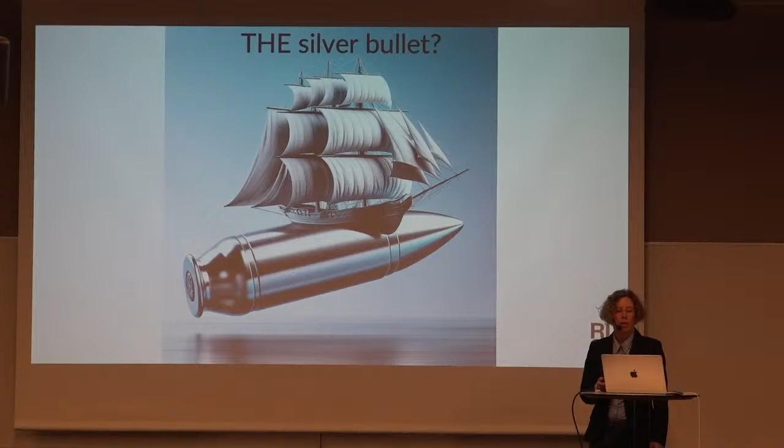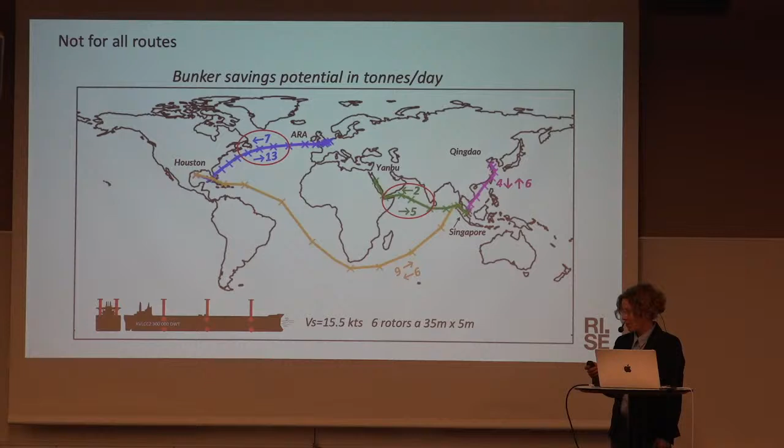But having said that, there are many merits. It's a technology that is available today, and we don't need any new infrastructure in the ports for bunkering. It's a free source of energy, and it's predictable. That's maybe surprising for some of you when I say that wind energy is predictable.

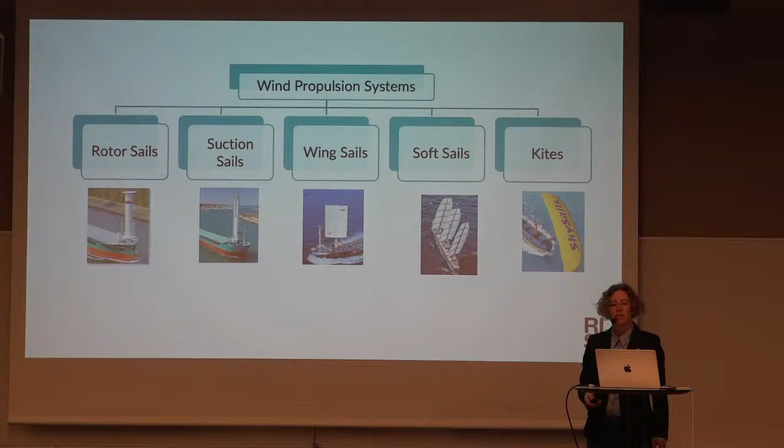So to give you a short overview of the techniques on the market today. Probably many of you have heard these words: rotor sails, suction sails, and wing sails. These are the most dominating technologies today. Soft sails are mainly applied on large yachts, and a few examples of kites exist. But mainly rotor sails, suction sails, and wing sails dominate the market.

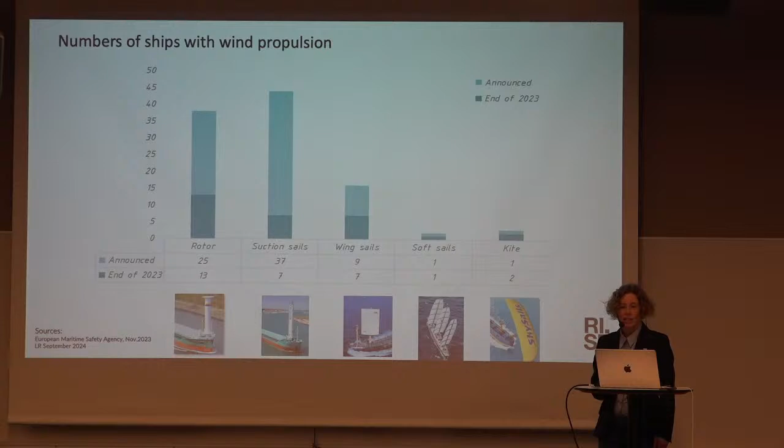Here we see the number of installations. These numbers are a bit old, but rotor sails and suction sails are still dominating. All in all, the latest number is I think 53 cargo vessels with wind propulsion out on the water today. That's a lot compared to a few years ago when we had one or two, but it's still only a fraction of the world fleet.

So I'm from RISE, Research Institutes of Sweden. It's owned by the government and an independent institute doing both research and service to the industry. So I will in this presentation talk a little bit about how we as a research institute can support this industry and the development of this new industry.

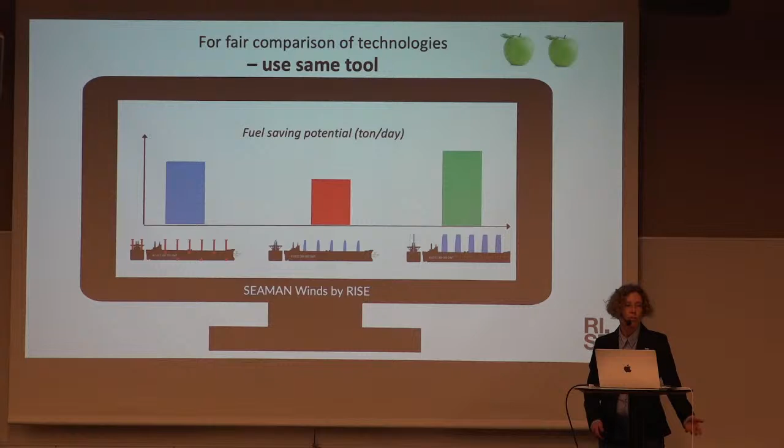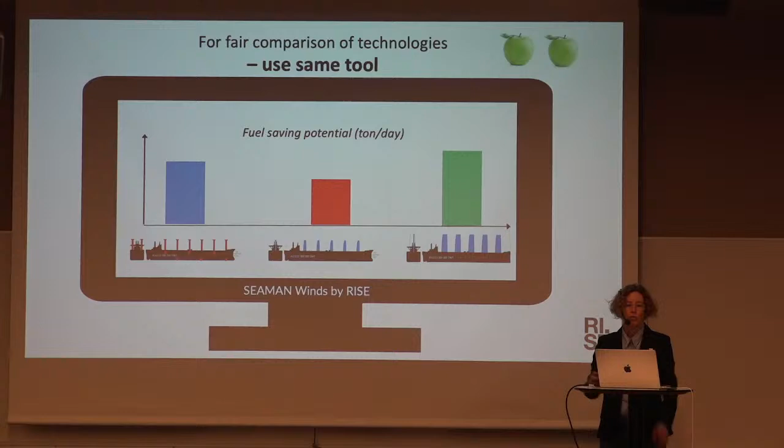So, for example, we at RISE have developed a tool we call SEAMAN Winds. There are many other organizations, universities and so on, that have their own tool that can do the same thing. But really the important thing is when we compare devices, we have to use the same tool and not take results from 3 different sources or organizations.

Inside such a tool, for us and probably the same for all the others with this kind of tool, there are 2 steps. It's a performance prediction program and a voyage simulation. So these 2 components are required, and these 2 in combination give a fuel saving en route, and that's really the performance KPI that we use, or power or energy saving on a route. So not the fuel saving on a particular wind or a particular day, but we have to take the average weather on a route covering both winter and summer and so on.

Inside such a program there are many small modules. It looks complicated and I will not go through it in detail. But the trick is to be able to use such a tool at different levels of complexity throughout the project. So when we start in the early phase with a market scan, we only use database sources from previous projects and so on. Then as we continue in the project phase, we can add more and more complexity to the calculations. And in the design phase, we can use, of course, all the big guns that we have.

And finally, end up with a sea trial where we can compare with a prediction. So just to give you one example of what can be a difference between these steps, I will mention here the assessment of the forces from a Flettner rotor. In the first stage, we just model the rotor standing on the floor as a single object, and we get some thrust force, for example.

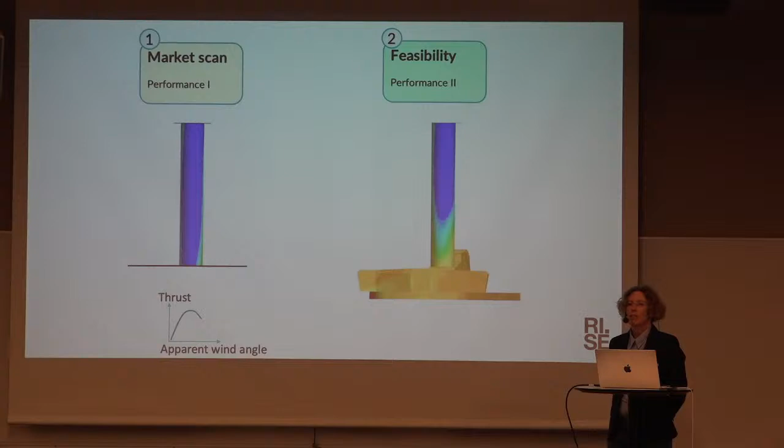In the next step, we put the same rotor on a ship and conduct CFD simulation for the same rotor. And here you see that the flow pattern is actually quite different now. When we put the same rotor on the ship, you see this blue area is the suction area, which provides the force, and it is much smaller now when we put it on the ship deck due to the disturbance of the hull. This is something that we still need to study more and do more research on, and here we have good help from a research project called Interact from Trafikverket.

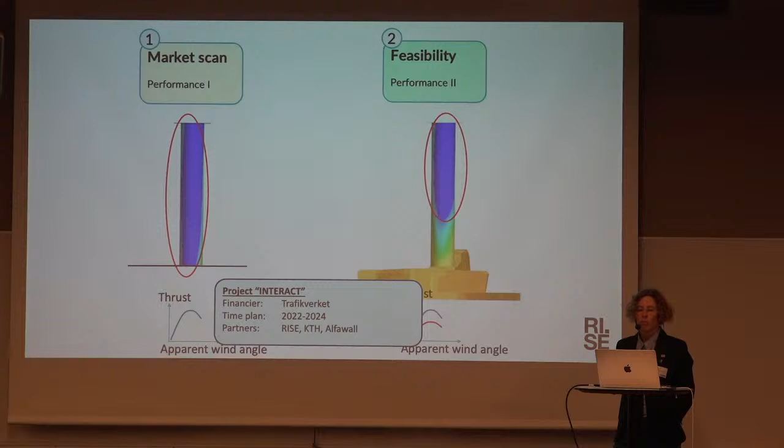Another important aspect to consider here in the performance assessment stage is interaction between wings or between rotors that we should not forget. And the best way to assess this is, of course, with CFD. The problem is that it's really heavy computations. It takes thousands of CPU hours, and it's difficult to use this tool in a design stage covering all the wind directions, all sheet angles, and so on.

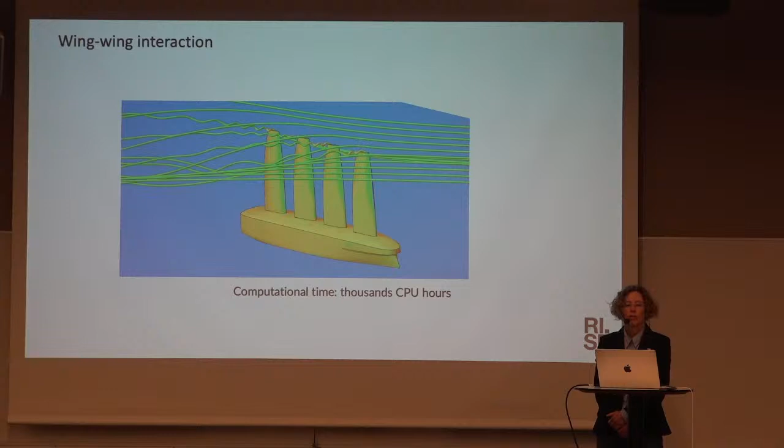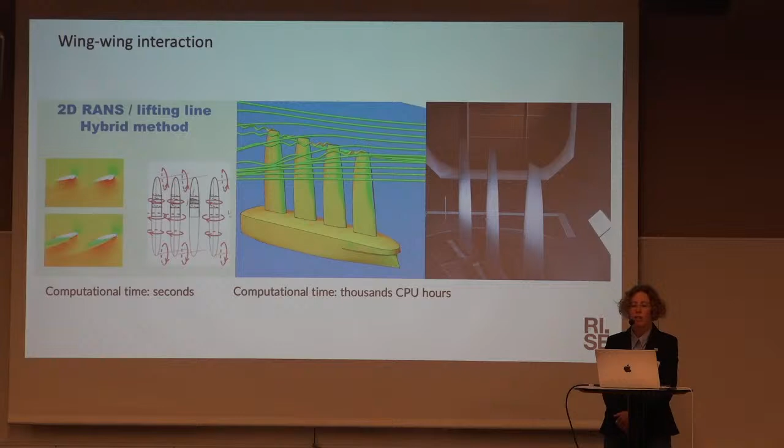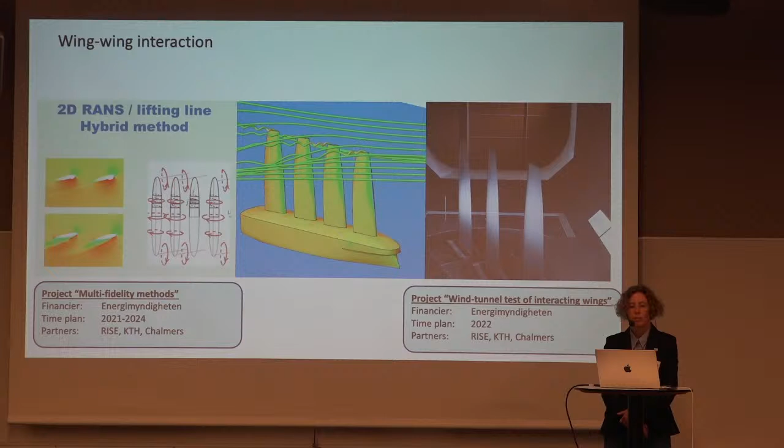So for that reason, we have spent a lot of time and effort to derive also low fidelity methods using a combination of RANS and lifting line to develop hybrid methods, which we also validated in wind tunnel in Southampton. Here you see the wind tunnel test with 3 wing sails in a row, really to see the interaction between them. Each wing here is almost one meter tall, so it was quite big wings. Here we got really great support from Energimyndigheten in 2 different projects to develop these methods and do the validation.

But fuel saving is not only a technical question, so it's not only a question for me, but also for other experts. And I explain what I mean by that with this example from another project. Here we see the fuel consumption curve for different speeds for a given vessel without wind propulsion and with wind propulsion. So in this example here, for example, at 16 knots, we could decrease the fuel consumption by 20%, roughly. Now, if we add weather routing on top of this, we can lower the fuel consumption considerably more. So the weather routing has really a huge effect here.

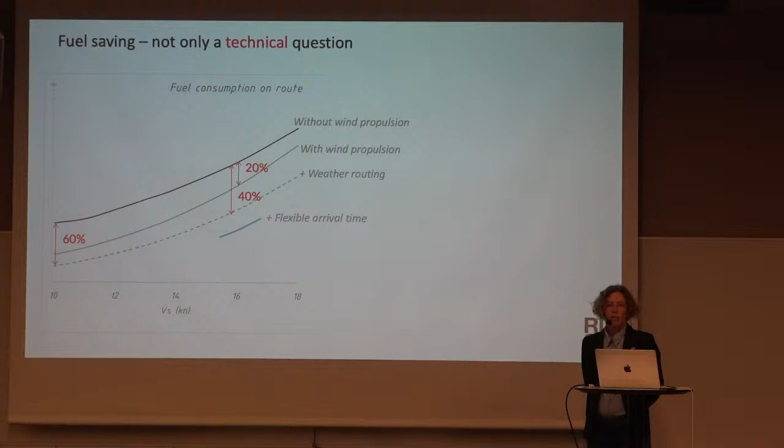If we look at 10 knots instead, the percentage number changes a lot, and we have here 60%. Now, if we also on top of this say that we have a flexible arrival time, we can be more flexible when we use engine or not. We can lower the curve even more.

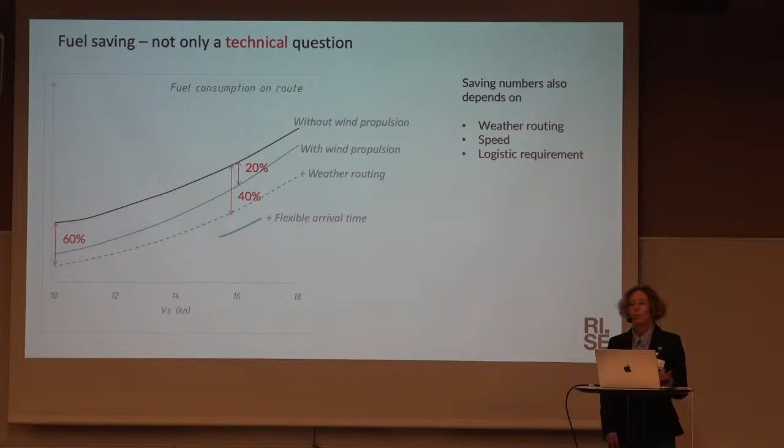So with this example, I want to show that the saving numbers that we hear is not only just a technical question. It's not only looking at this ship, what will this ship give, or this wing solution, rotor solution, what will it give. The number depends completely on how we will operate. So we will use the weather routing, the speed, logistic requirements. So that's why crew and cargo owners are also key players, and not only naval architects. Okay, so that was a performance assessment.

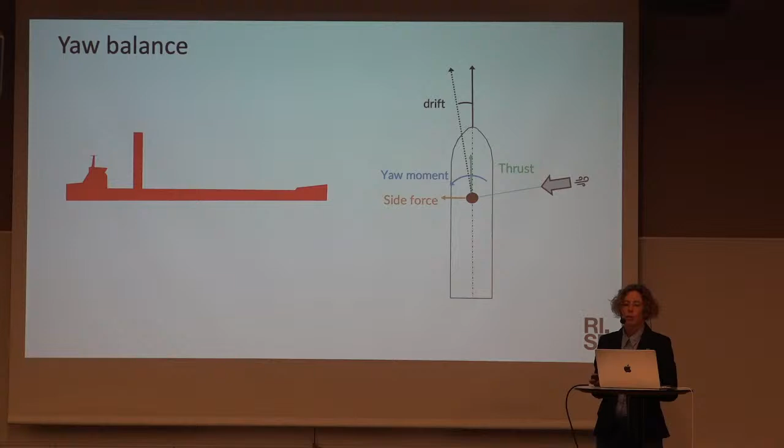I move into maneuverability. Here it's important to look at the yaw balance. That's more important for projects with wind propulsion than conventional projects. Because both the rotor sails or wing sails, they produce, of course, the thrust force. That's what they are meant to do, but also side force. That makes the ship have a drift angle, but there will also be a yaw moment, which you need to balance with a rudder.

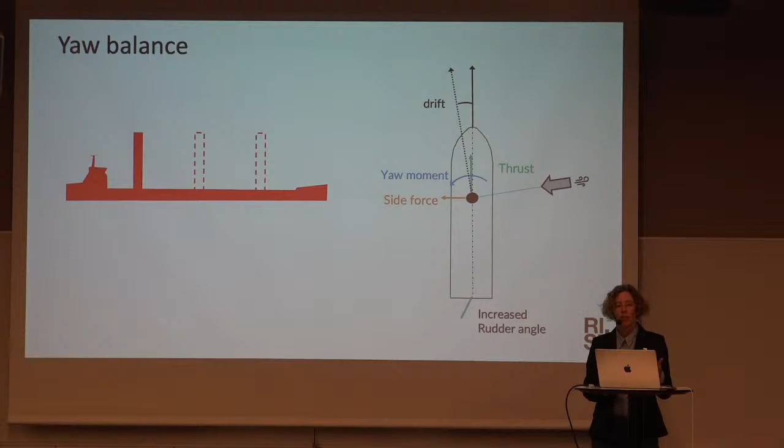This yaw moment and yaw balance, it depends. It's affected a lot by the position of the wing sail or the rotor sail on the ship. So that's why it's very important to analyze this at an early design stage. I mean, if we continue too far in the design and discover this problem late, it will be quite expensive to do changes. Here I will give one example that illustrates this.

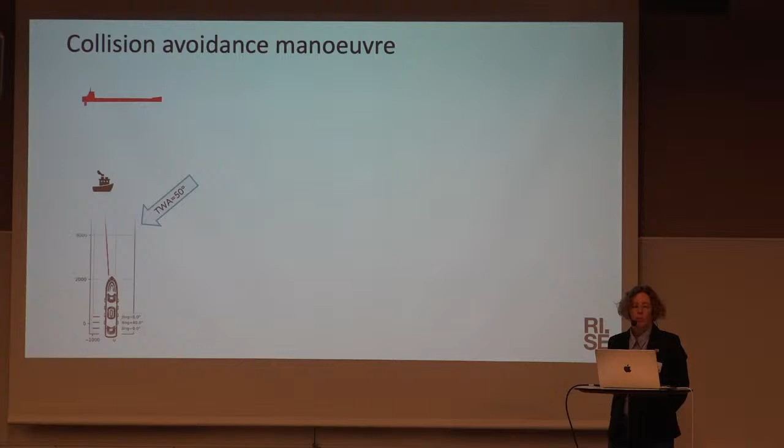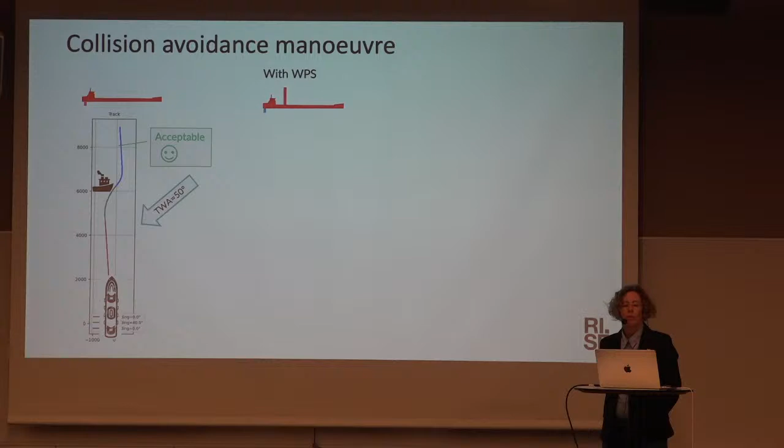So here we have a normal ship without wind propulsion. We do a time domain simulation here, a collision avoidance maneuver. The ship discovers this small fishing vessel and does an avoidance maneuver and comes back to course. So this is acceptable. Now we add this Flettner rotor on this fictive ship and try to repeat the simulation. And here the ship cannot come back to the original heading because the initial rudder angle was too large just to keep the course.

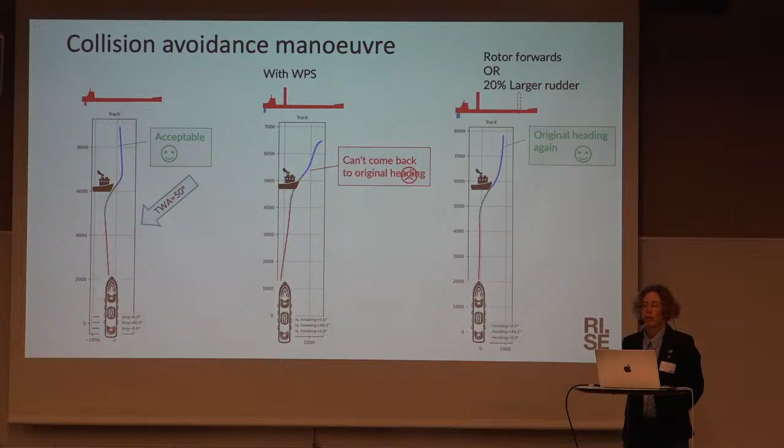Now we can do two things. We can either move this rotor more forward or increase the rudder area. And we try again, and we see that now it's acceptable again. This kind of study is fairly quick and easy to do at an early design stage, and we found it's really useful to find problems and correct them at this stage.

So the ship motions change the forces on the wing sails, but also the wing sails change the ship motions, because it adds aerodynamic damping to the ship. So this interacting effect is also quite interesting to study. These kind of simulations can be very useful for checking the control systems and also assessing loads for structural fatigue and so on.

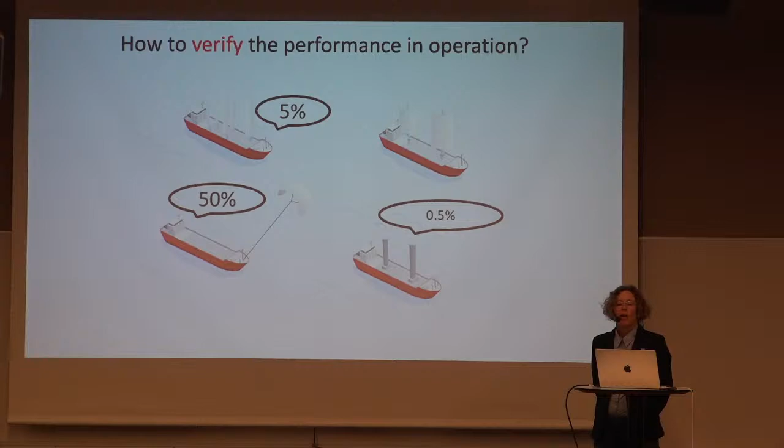Good, we move on to sea trials and how to verify the performance in operation in real life.

We received this question back in 2020 to verify the performance of five vessels in an EU research project, and there was no procedure at that time for how to do such a sea trial. So we had to derive a sea trial procedure, which we then brought into the ITTC committee, and that ended up becoming the procedure that is now published.

Very briefly, here's how it works. It's simply on-off runs, short runs with the wind propulsion device on and off, in a minimum of 5 wind directions. We measure the speed, engine power, and the wind, and from that we can work out whether the power saving prediction was correct or as expected.

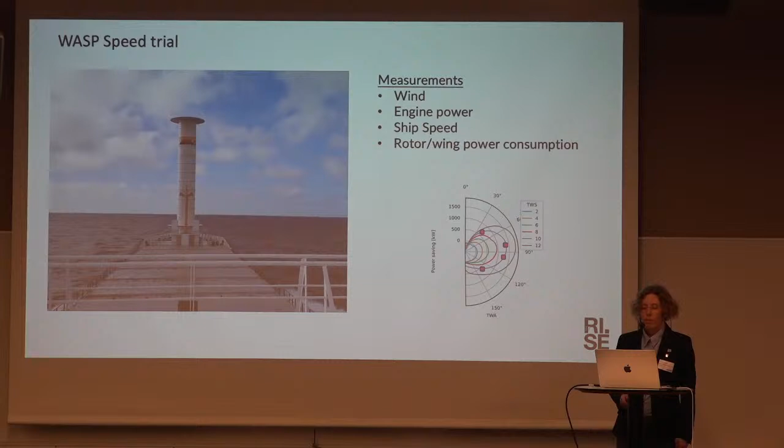Here are some examples, and you see there's some scatter in the results, of course, since this is full-scale measurements. But at least it gives some indication of the savings.

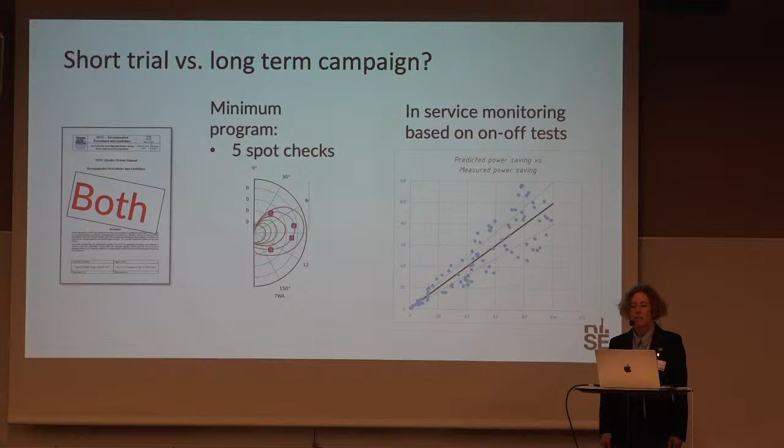This procedure describes how we can do this both in short trials and long-term campaigns. So for a short trial with 5 points, it takes 1 day to conduct, giving just a spot check of the polar. But we can also continue for weeks or months, gathering more data, and see how it corresponds to the prediction.

Okay, final subject here: operational aspects.

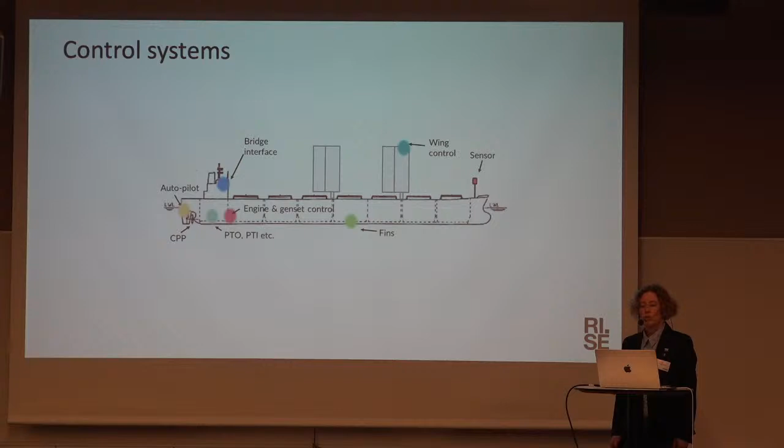These vessels, like all vessels, have various control systems. But maybe even more important now for wind-assisted ships is that the control systems work well together, especially the wing control or rotor control system with the sensors and the propeller engine, so that these kinds of ships work in the most optimal way.

One problem is that there are probably different companies and organizations providing all these devices. So one company provides the wings, another the propeller, and they have their own control systems with IP rights and so on. How can we make sure that they work well together?

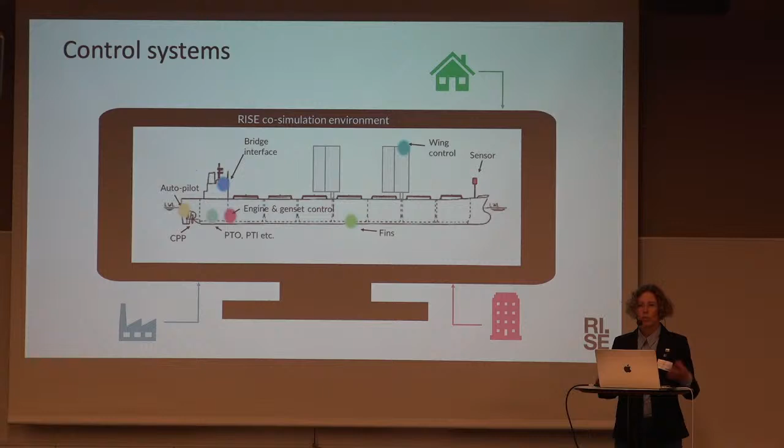So here we have developed what we call a co-simulation platform, working with FMI, so that all these organizations can plug in their control system to one common platform and make sure they work properly together. This is something we work on in a project from Hållbar Sjöfart called Virtual Wind Ship.

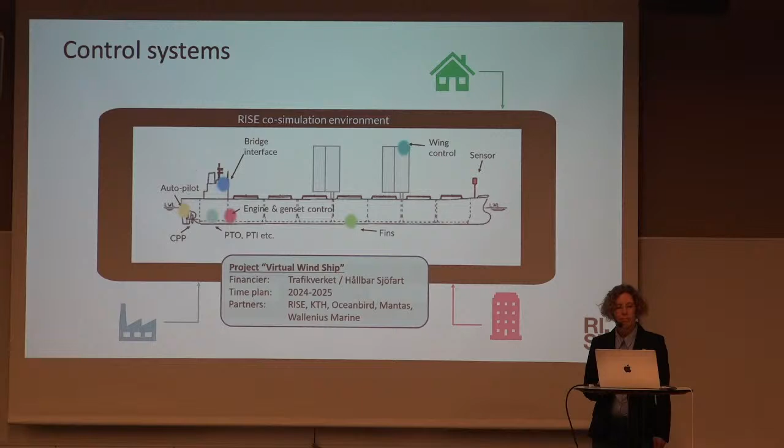Another topic, sail trimming, and I think Olis will talk more about that later. But just as on a normal sailing boat, the sail or the wing needs to be adjusted to the wind direction to work in the best way.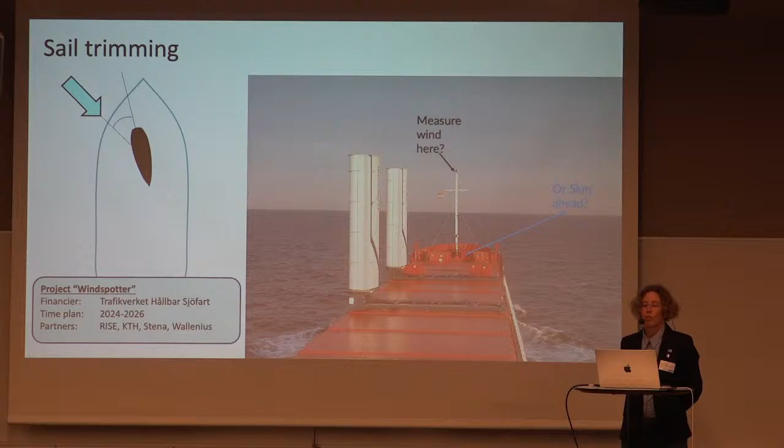And here we have just started a project called Windspotter, also from Hållbar Sjöfart, where we will look into the possibility of using LiDAR to spot the wind shift before it comes, and be prepared for it.

Finally, a few words about the crew.

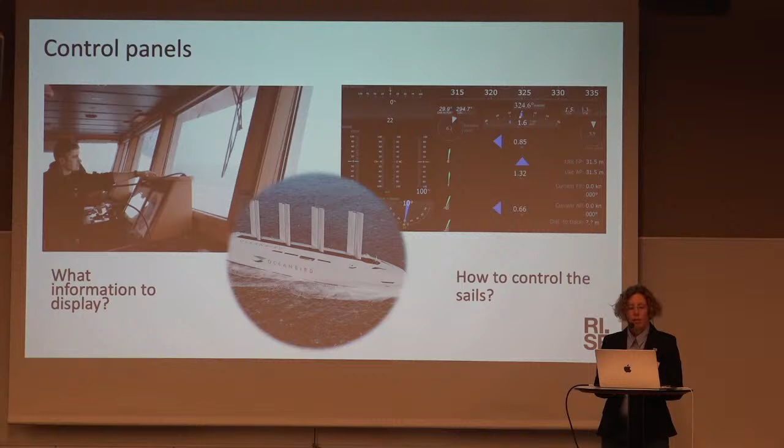This new technology will require some control panels, and how should these control panels be designed so that the crew can operate it in the best way? What information do they want to see? To test this, we have had sessions in our simulator with real captains to try out different control panel designs, see how they interpret them, how they can understand it, how easy it is to operate. This has been really useful feedback to the designer of the wind propulsion devices, helping make the control panels more understandable.

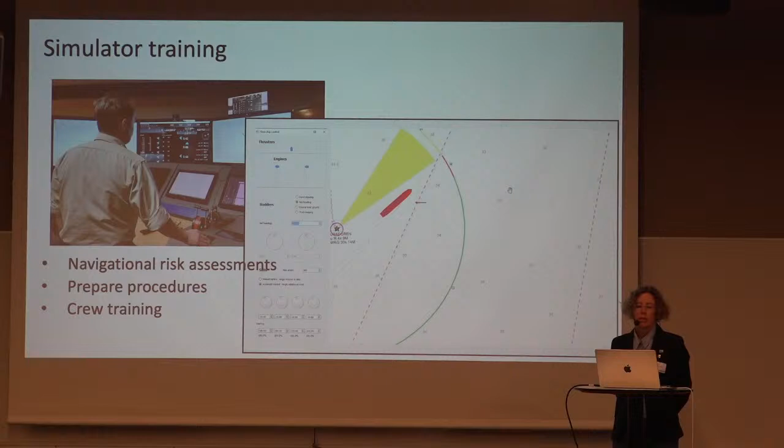Then, of course, the same simulator setup can be used for training crew and preparing procedures and risk assessments.

A short summary of what I tried to tell here is that research efforts are really essential for reaching the climate goals of shipping. Sweden currently has great excellence in wind propulsion for ships, and we should really use that. We have institutes, universities, and industry working together, with strong support from authorities, which has been essential to develop all the tools and knowledge that we now have in Sweden. I hope this will continue, and we're very thankful for all the support we've received.

Thank you, Sofia. Thank you.

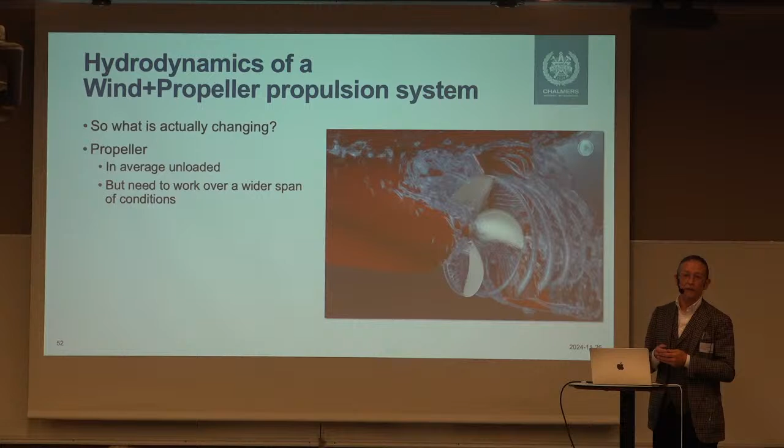I will focus not on the hull design or hydrodynamics in general, but on the propulsion system - how the hull, propeller and rudder interact, what effects that has, and the need for research and what we have done lately. So what is actually changing? Well, if we now have these savings that Sofia talked about, this means that the propeller will be unloaded, requiring less force or less thrust from the propeller.

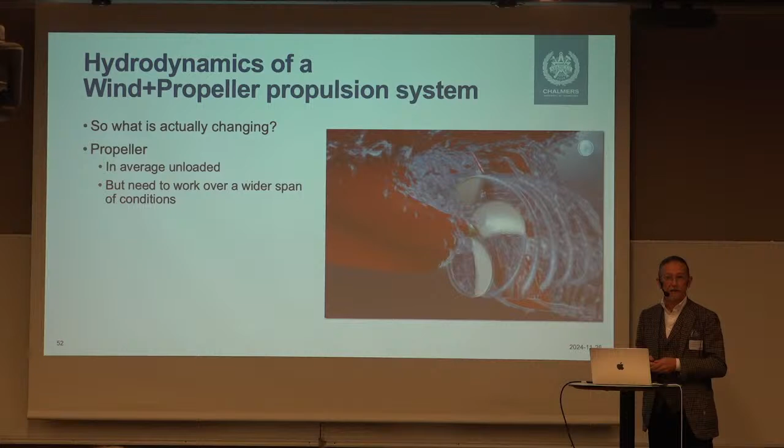That might change the design. But at the same point, if we now talk about motor sailing for a vessel that's normally sailing but needs to be operable in heavy weather, we have a huge range of operating conditions that this propeller or propulsion system should manage. From zero, where you're only sailing and need as little drag as possible, to maybe operating in tough weather at heavy load. So this poses challenges for the marine propulsion system.

Sofia also mentioned the rudder. If you're now sailing, you have less flow over the rudder, which means you'll have less side force from the rudder. That also affects maneuverability, in addition to the drift, which you need to compensate for with the rudder, depending on how the sail arrangement is done.

So I'll talk a little bit about a few of these aspects and give some examples, including scale effects. Traditionally, we know how to do model scale experiments and full-scale performance predictions with a margin comparable to sea trial tests. But now that we have the wind, unloading of the propeller, and rudder effects, these things might change, so we need to consider them as well.

The first thing I'll talk about is a project we ran here with Lighthouse, where we looked at propeller design. The first question is: at which design point should we design the propeller for? In this case, we're sailing with zero thrust as the main idea of this vessel, but we have operation points at different thrusts.

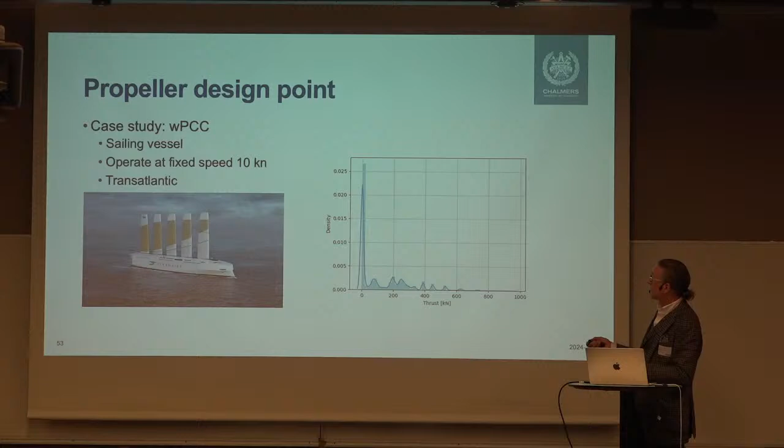Here's the thrust, and here's the probability, or how much time we spend in these operating conditions. Normally one operates here 90% of the time or more for a vessel, so then it's quite obvious. But if we now have this range of conditions, for what condition should we design the propeller? Here we also looked at controllable pitch operation to cover this setting.

This becomes even more important if we sail against the wind - then we might run into problems being beyond the engine limit, and the controllable pitch becomes crucial. For this kind of vessel, we also did a study with a tanker with approximately 15 to 20% average wind power, and it was perfectly fine to use the traditional fixed pitch already installed. But for this case, with these huge variations, a controllable pitch is essential for the operation.

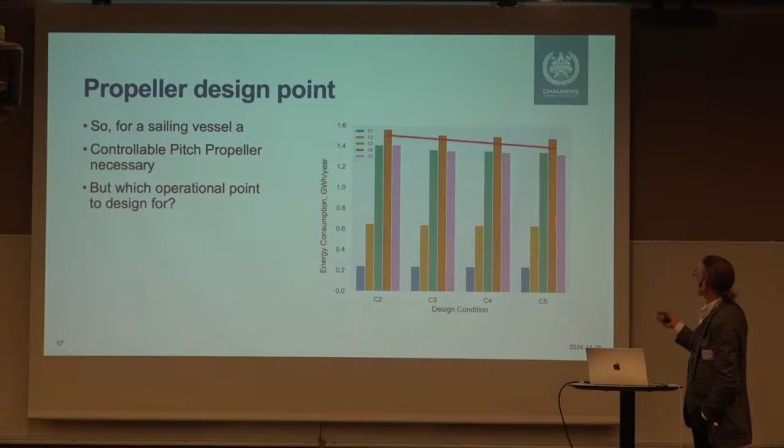We can see a clear trend that if we design the propeller for C5, the most heavy condition, we gain the most total savings for this vessel. Actually, even though C4 was the most common condition, from an energy perspective C5 design covered that well too. So the experience from this test case was that we need to design for the heavy loading condition and make sure it also operates okay in the lighter loaded conditions.

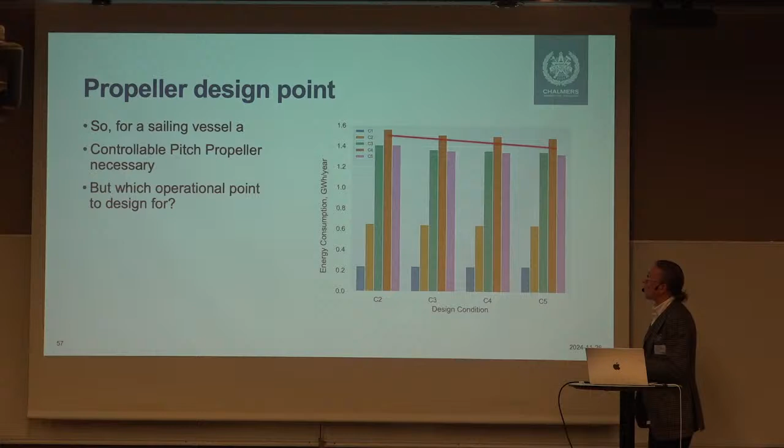So this was one experience from this sail prop project that we ran within Lighthouse.

Then looking at system effects a little bit, we have recently looked at this chemical tanker. I think Klaus is here somewhere - it happened to be a Tarntank, but it's a Kongsberg design, so we used that in our study. Tarntank was not involved in this one at this stage, at least. We just wanted to look at the system effects of this vessel.

So we assumed wind-assisted conditions from 0 to 20%, just hypothetically, without thinking about the aerodynamics of it, just to look at how the propeller works.

And we looked at two different designs. So we had the original design, which is already a very slim, low area blade. But designing for the wind condition, Kongsberg did this design, so we reduced the area even further. So how much do you then gain by changing the propeller at the same time as you add the wind assistance to this kind of vessel?

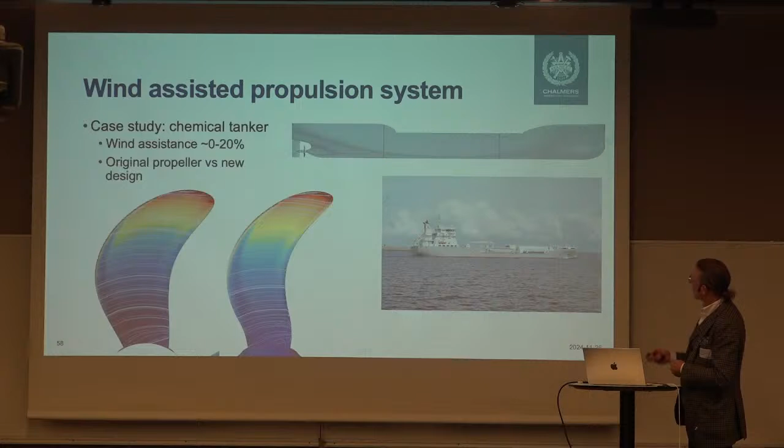Okay. So we did the self-propulsion CFD, so we ran the ship. Now we didn't consider all aerodynamic effects. This was limited to hydrodynamics, so we didn't include the drift angle, for example, or variations in wind. But we ran self-propulsion in full scale with the original propeller and the new design of the propeller here. And we assumed a wind thrust from 0 addition to approximately 20% added wind.

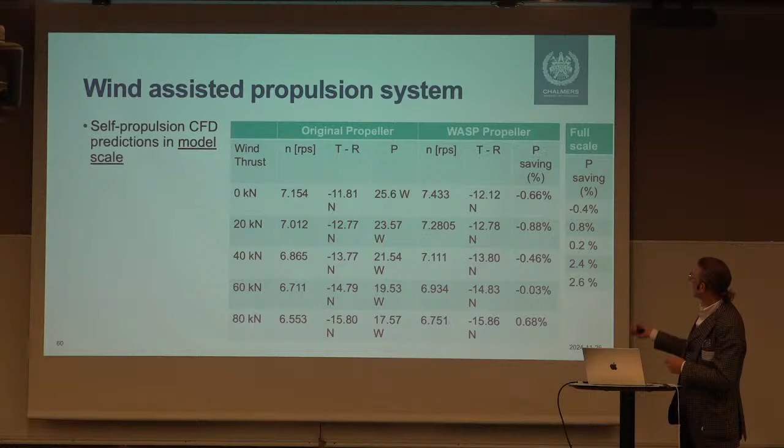Then the interesting part comes if we look at model scale instead. So we did exactly the same thing in model scale. And then you can see the predicted savings here. So in fact, doing the same study in model scale, we don't see any additional gain from the hydrodynamics. So there's a clear scale aspect to this, that a model scale test, model scale simulation assessment will not give the same answer as if we do it in full scale. So what's going on? We don't know for the moment.

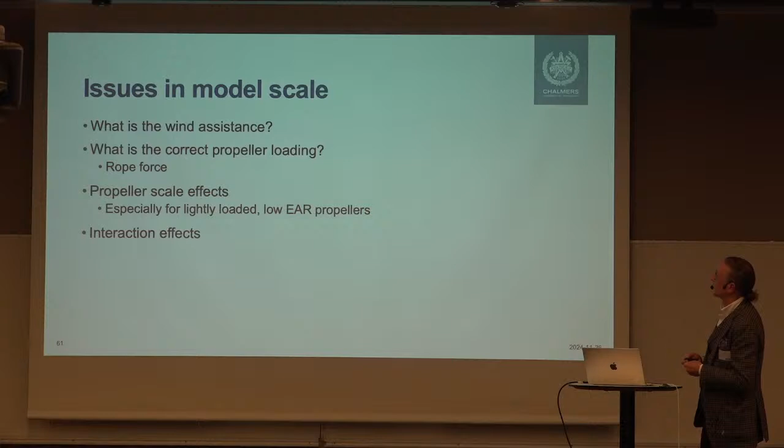But there are, of course, issues. We had to assume something. How do we translate the wind assist in? So it's easy in full scale. We know the resistance. We can assume this amount of force. But to predict the wind power or wind thrust in model scale is also a challenge. And also, how should we balance? What's the propeller load? So if we do a model scale test, we add a rope force in order to get the correct propeller loading for the self-propulsion test. But how do we do that when we have wind assistance? How do we combine these?

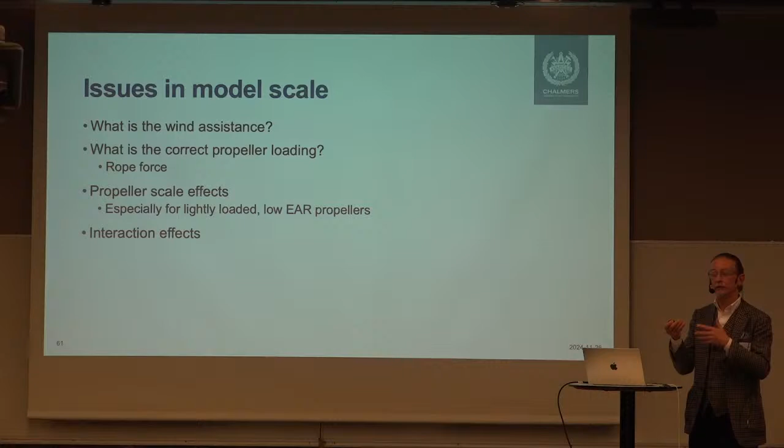And then we have scale effects on the propeller and on the hull to consider, which we believe are even more important when we have these really low blade area propellers. There are other effects than friction that come into play. So this is also unexplored. And there are then obviously, as we saw in the previous slide, interaction effects between these. They don't work the same in model scale as in full scale. And these are research questions that partly at least will be addressed in a new PhD project at Chalmers and RISE that is funded by Lighthouse. So these are open areas to look into.

Finally then, thinking about rudder performance, I mentioned before that we get less side force. So if we look at the standard lift, this is the lift coefficient here to the angle of attack of a foil section. We can see here that we get a linear behavior depending on the angle of attack of the foil. But this is then the lift coefficient. So to get the force, we need to multiply by the velocity, so the velocity comes into play here.

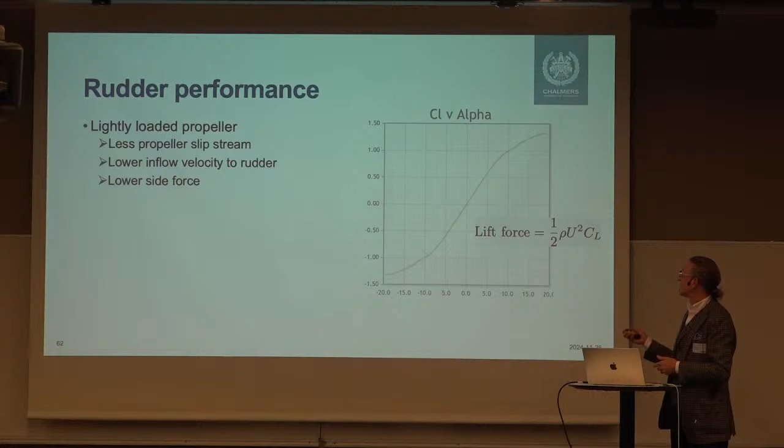And the velocity for a rudder, if placed behind the propeller, is governed by the propeller slip. So the propeller accelerates the flow, so it controls the flow over the rudder. Which means that if we now have less propeller loading, the propeller slip will be reduced, so the velocity will be reduced, and thus the force. Even if we're at the same angle of attack and have the same lift coefficient, the actual force will be less.

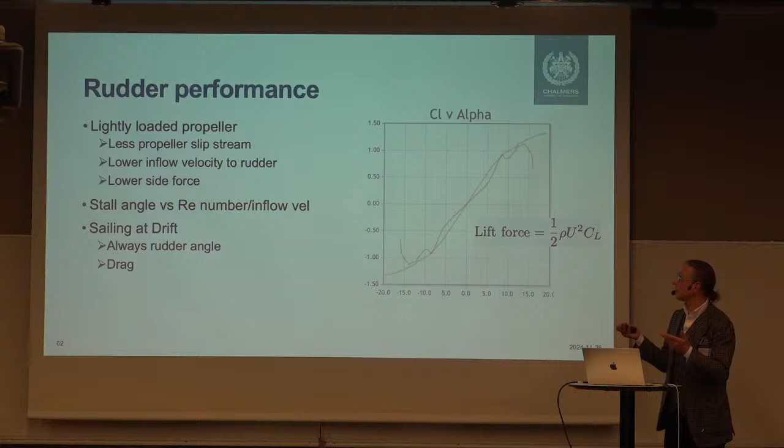We'll also, with this lower velocity, might run into stall problems and a bit more complicated behavior because of this lower velocity. So there are more aspects, we believe, to looking at the rudder than changing just the size of it. It was also mentioned that at drift we always have a rudder angle. So increasing the size will increase the drag when we have low velocity or normal operation, but it will also increase drag for sailing at drift.

So this is also an upcoming project, where we're looking at propeller-rudder interaction for sailing conditions with different angles of attack and lightly loaded propellers, low slipstream, to actually figure out what goes on and in the long run see if we can improve the propeller or the rudder design for wind-assisted vessels.

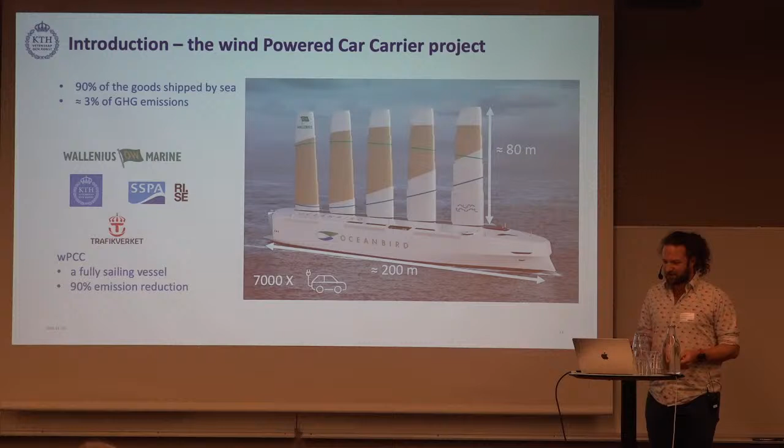It looked like that at the beginning. You might have seen it look like that. Actually, Ricardo did, so I think you've seen all versions so far. Still the same idea, just the commercial design evolved at the same time as the research project. And then it ended up looking like this, the latest version with new wings that I think we will hear about this afternoon. They got a little bit shorter, but a bit more efficient, so it should work anyway. So most of that was done in this context.

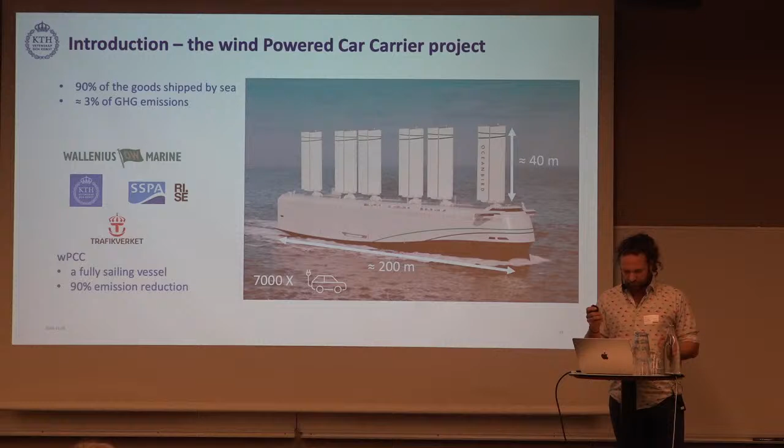One of the biggest questions that we've tried to answer at KTH so far is, how do we control these huge wings, and the whole vessel? Because that beautiful ship that I showed at the beginning had a fairly large crew to do that. Can we really today have a crew sitting on the deck and look at 80-meter wings and trim them? Probably not, for many reasons. First, they don't really know how to do that. That's not their job. Second, an 80-meter wing is kind of hard to look at. So you can't really do it.

And it's not like a normal sailing boat where you can just sit and feel, okay, I trim my main sail a bit and I feel that I go faster. You won't really feel much on this huge ship. But anyway, we need to try to control them. And there are some questions we need to answer before being able to control them. The first one, even though it feels obvious, is that we need to know the wind, because the wind is our fuel. The wind is really what we need.

So one question, or two questions, since there are two question marks, is how the wind profile evolves vertically offshore, and how much influence we have of the vessel versus the other.

That's one question. Another question that Sophia has already talked a little bit about is how are the wings interacting with each other, with the hull? This is fairly important because now again we're talking about a wind propulsion project. We need a lot of surface to generate enough thrust. If we put one, maybe two systems, it's a little bit easier, but now we really need to get the best out of that. So we need to make sure that we understand that very well.

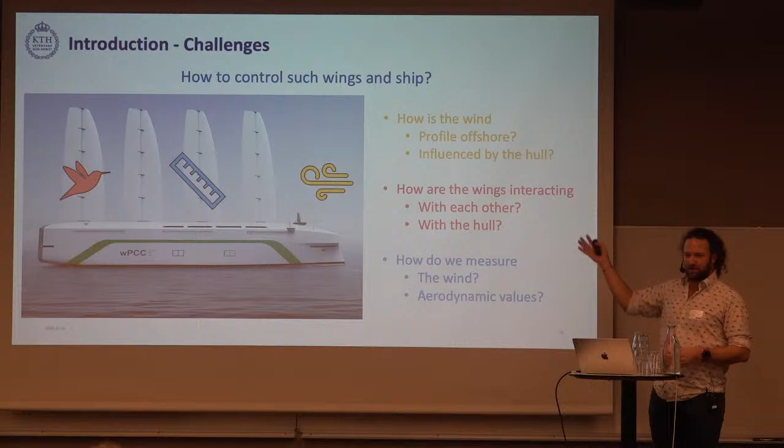And another aspect that is slightly different is how do we measure things? It's actually pretty tricky. How do we measure the wind? How do we measure the aerodynamic values? Like when we talk about the lift coefficient of an airfoil, of course in a wind tunnel or in CFD it's very easy. I can say I have that much lift, I have that much thrust. In practice, in real life, how do we measure these things? How do we calculate them? Those are some questions that we need to answer to be able to answer the bigger question, how to control such wings and ship.

Of course, the hydrodynamics is very important, but this is not an aspect I will talk about. We already heard some. So I'm only going to talk about wind, or what's above. And a little more background: why am I talking about aerodynamics? Why did Sophia talk about that? We know a lot about aerodynamics. We have had planes for a really long time, and we have a lot of data from that. But they're actually fairly different.

One thing: a plane has pretty much one wing, two if we count the tail, but the tail is very small, it's very far apart, it has a different purpose, and also they are kind of small. This is a top view of an Airbus A380, supposedly a pretty big plane, to scale with our test case. Now it doesn't look that big anymore. So the aerodynamics is actually pretty different.

The interaction effects don't really exist on a plane, so they don't really know that in the plane industry. We used to have biplanes or triplanes, but then again, it's only in one direction, and that was a while ago. So research-wise, we don't really have the data. So it's difficult to use that. So we need to know more.

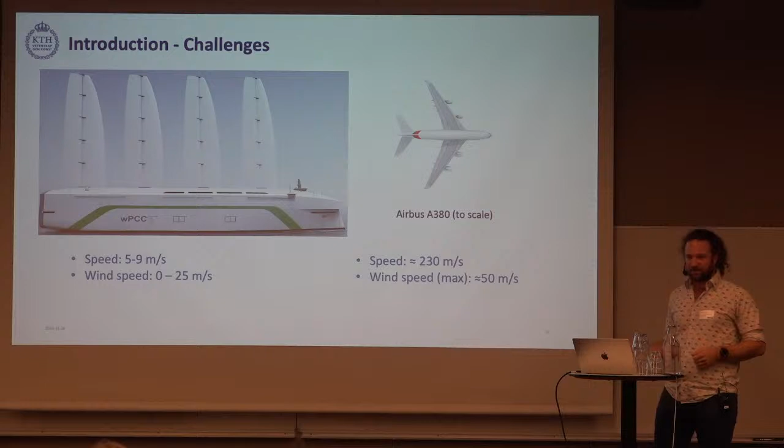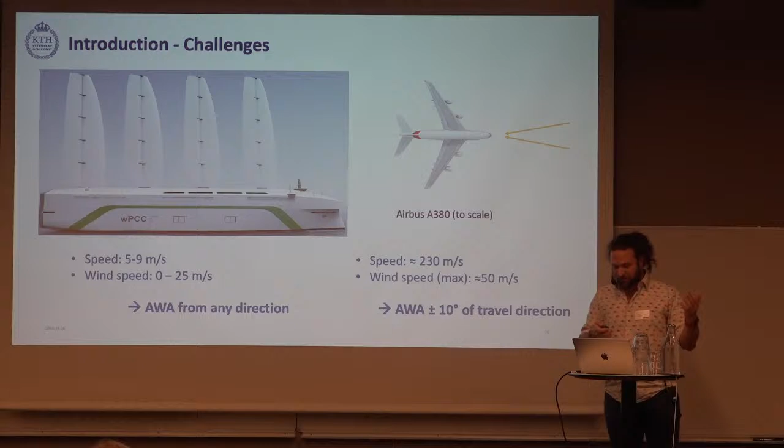A plane goes around 450, 500 knots, 230 meters per second. And it's much higher up, so it's higher wind speed, but maybe of the order of 50 meters per second. Which means that an airplane will always have a wind that is pretty much straight ahead, maybe plus minus 10 degrees. They go so fast. But on our boats, we have wind coming from anywhere. Even in case of motor sailing, we still have a very wide range of wind directions, which means we have different aerodynamic interactions and different aerodynamic aspects.

Now in the title I had experimental, because we heard a lot about CFD and it makes very nice graphs and we get a lot out of CFD, but I like real life. And especially for the first aspect, we wanted to know the wind, and I hope that's partially something new. We know the wind very well on land because we live there, because we have things that make it necessary to know the wind.

We know the wind pretty well close to land, offshore, because of the wind energy industry. We put wind farms close to land because it's still shallow enough that we can do it. But when we go very far offshore, there is almost no measurement. There are a couple of buoys, a couple of vessels report their measurements, but except for that, we only have satellite measurements, which means we don't really know much of what's happening. So we only rely on mathematical models.

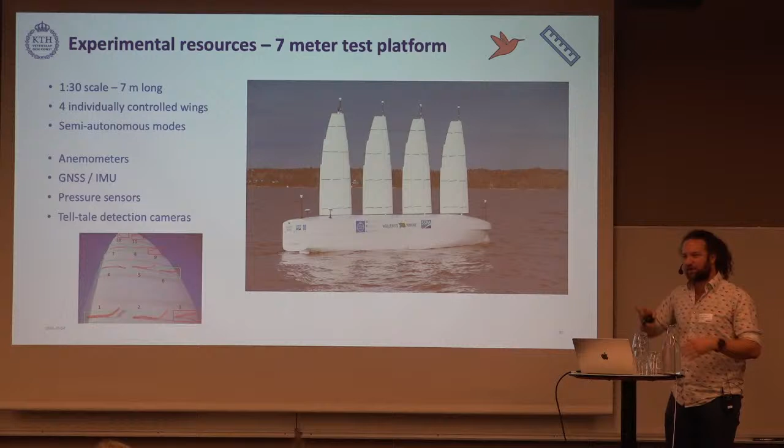Of course, scaling here, nothing is correct. We know that. The rudders are too small, the hull is too small. Maybe we managed to get the Froude scaling and the waves kind of okay if we go in nice conditions.

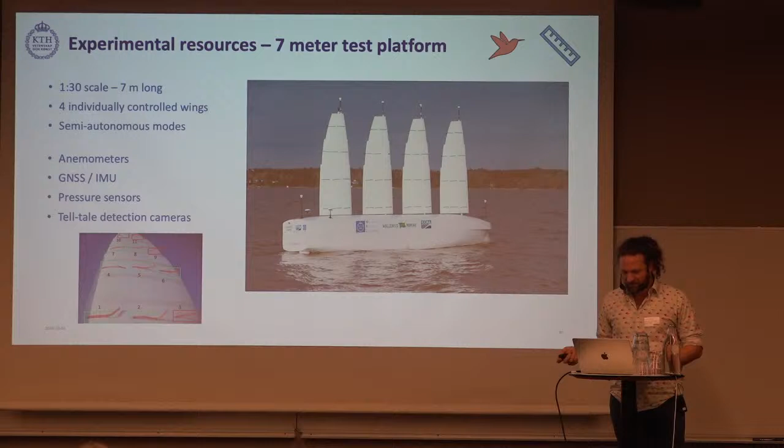But that's not the point. The point is we can do tests in one way and then in another way in the same conditions, and we can compare them and see how it behaves. The beauty of real life is that things happen that we didn't think about. If you set up a simulation, you're going to get the outcome based on what you input. But when you don't know what you input, because we don't know what happens in real life, then other things happen, and that's pretty nice. It makes it difficult to process the data, but it's interesting at the end.

Now, some key results. I already talked about those challenges, I'm not going to go through them again. So how is the wind profile?

The first question: if we look on the left, all the tiny gray curves are actual measurements of the wind speed from the deck, or slightly above the deck, up to 228 meters. What's interesting here is this is measurements from one day, in December a few years ago. And during that one day, we got pretty much the whole spectrum of how the wind profile might look like. Sometimes it was very straight, sometimes very curved, and that affects the performance of a wing, of a rotor, of any ship that's going through there.

Something didn't go correctly in the presentation. There were not supposed to be any numbers here, but it doesn't matter. Oh no, they're not there. Sorry, this might look a little bit weird.

This is just putting some numbers behind these shapes. One way to represent the wind is using a power law. We need an exponent, a value of an exponent, and that's the distribution that we get - how often do we get wind.

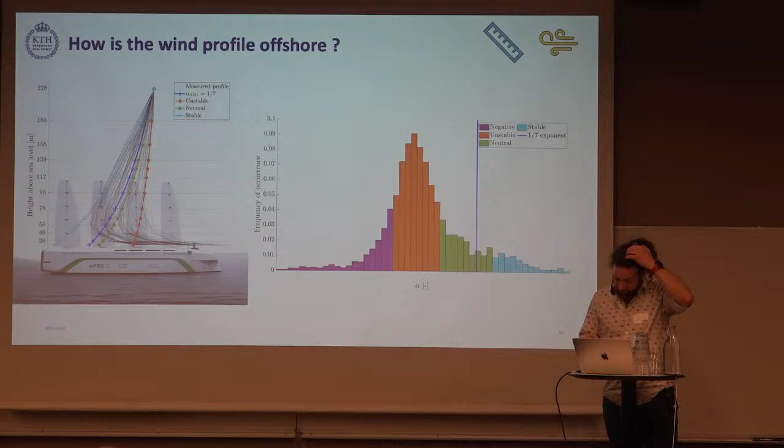And yeah, that's going to impact our performance a lot. I can skip that one - I think I'm talking way too much.

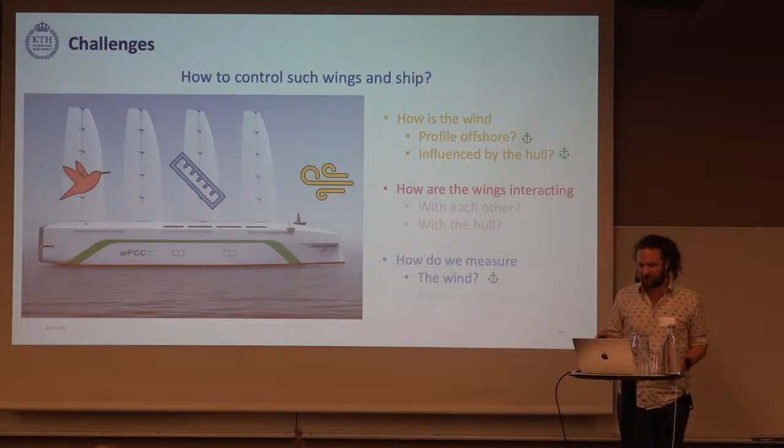So now I talked about the wind - how is the wind profile, how it is offshore, a little bit how to measure it. Now I talked about the LiDAR, but any measurement we do here is wrong, pretty much - any measurement we do on the ship is not correct. If we don't manage to measure 100 meters above, it's something else. But even if we measure 100 meters above, if I measure here, how do I know which curve I should follow right now, right here where I am, to know what the actual wind speed is at my deck level? Given that in one day it can change that much, even just measuring the wind is something very difficult.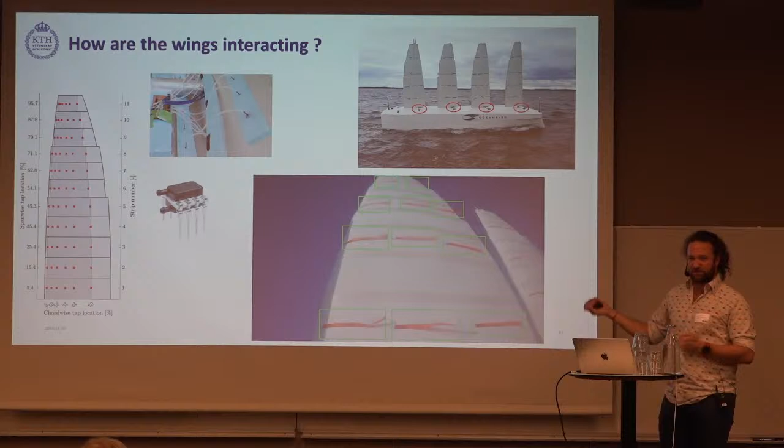One thing is that we want to understand what's happening, so on this boat we had a lot of different sensors. We put some pressure sensors - you don't see them, there are teeny tiny holes on the wings - so we measure the actual flow around.

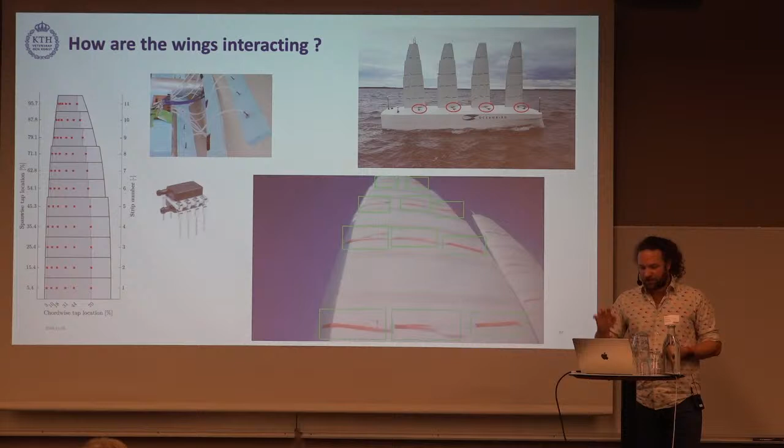But then these telltales are normally used by sailors as well, so we thought let's try to use them as a sailor would on a normal boat. We put cameras looking at the telltales, and then we have an algorithm trying to detect whether they are attached or detached, and then we move the wings around. There you can see - I have hours of very interesting footage of wings like that, and we see that things happen, we can measure things with that.

What we get out of that is pretty curves. Don't need to talk much about it, but we move the wings around. What's interesting is with the telltales, we somehow get either the flow nicely attached or the wings completely stalled and we don't have as much force, and we can correlate them very well to the pressure measurement. So both techniques work, they have their pros and cons. The aim was to test different techniques and get aerodynamic data.

Then out of that, we get some pretty graphs. If we look on the left, if we have all the wings at the same angle, we get some amount of lift on the aft wing and a bit more to the front. And then if we go on a beam reach with the wind from the side, then we get pretty different values and different change. And then, as I said at the beginning, the aim was to try to control.

So we want also to know how to maximize what we get out of the wings. We tried some with the 7-meter model - not really a proper optimization, we just try different strategies, sheeting the wings a little bit differently, gradually. And we can see that we can get much higher force in total.

Maybe a bit more on some, a bit less on some, but globally we can improve that, both upwind and beam reach. I didn't put the angles, but the angles are actually quite different to get this lift.

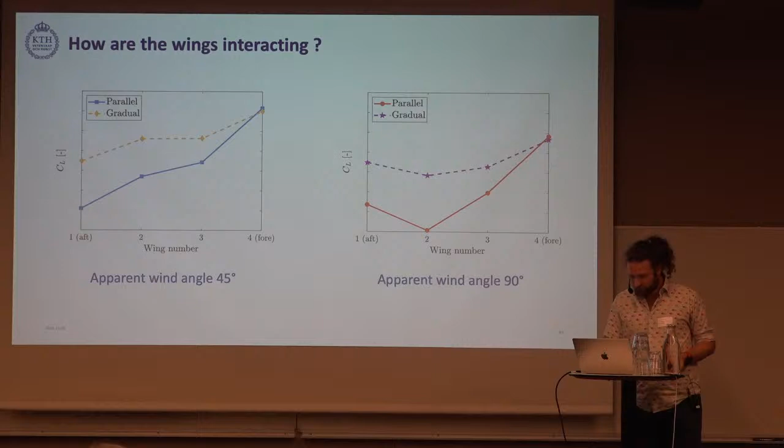Now I talked about how the wings are interacting and a little bit how to measure them. And then at the end, I'm going to conclude—I don't even know how long I've been talking.

When we have all this, we have better tools to know the wind, we know their interactions, and we can put all that into a velocity prediction program, the one from SSPA or another one. It's good to have different ways of calculating. We can put them into a time domain simulator so we can simulate something that should be as close as possible to reality.

On top of that, once we have that, we can do weather routing. And once we do all that, we can try, even on the scale of a whole weather route, to see if we gain that much by trying to move the sails all the time. Or does it not matter? Should I just let them stall? Do I really need that gradual trimming? We can test all that, from measurement to actual testing on a longer route.

I think that was actually a pretty good conclusion. The wind profile is globally more straight than we thought, at least. The hull influence is maybe even larger than expected.

It is difficult to measure the wind, so that's why Sofia talked about one project we have now starting—we try other techniques, other ways to do that. The wing interaction is very important, and the hull, of course, is important too.

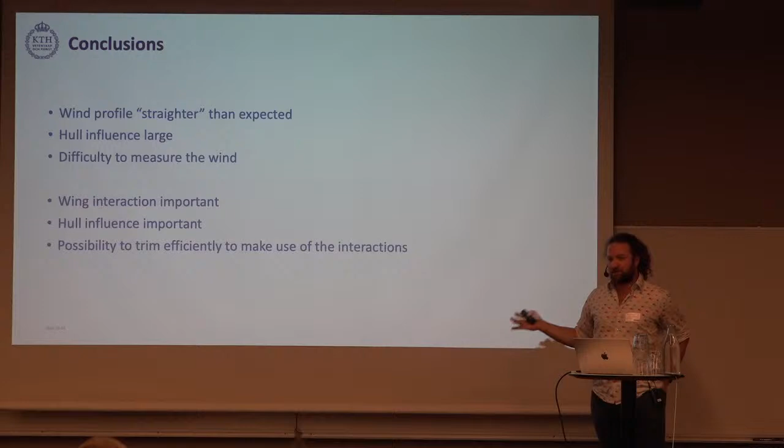But if we trim, if we put some focus on how to use that—maybe, if we don't do anything, it's pretty detrimental, we lose quite a bit of performance with wing interaction. But if we know it, and if we think about it, we can actually use it.

We talked a little bit about yaw control earlier. Because we have these interactions and because we have so many wings, we can actually work on that too. The objectives need to be slightly different than what we would think first, but maybe we can sacrifice a little bit of lift on one wing and instead the rudder becomes more straight, and that's all nice and good. We can do all that.

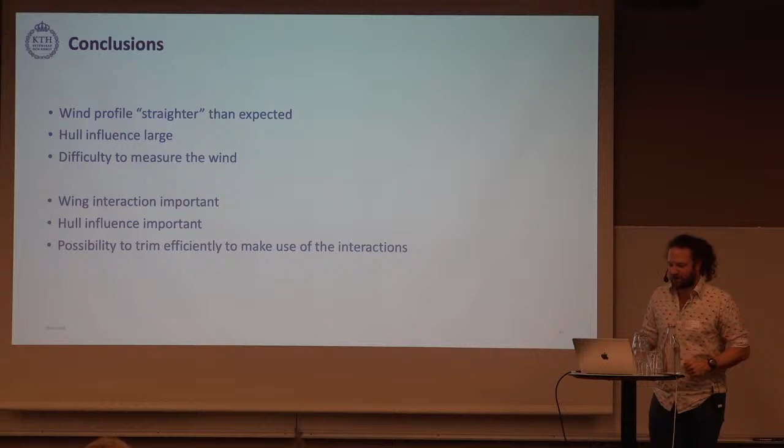And we have a nice test platform to test this at KTH. Thank you for your attention.

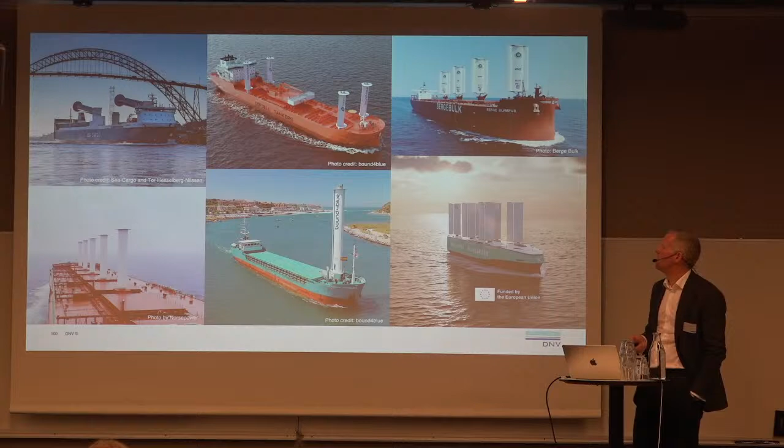We are in the very early phases of, let's say, the new wind era or the second wind era. There are some ships out there with different types of wind solutions, rotor sails, hard sails, suction sails, etc. We've seen these pictures before. I guess we will see more of them throughout the day as well. Sofia was talking about the various types of sails. I think it's also fair to say that when we talk about sail solutions from our perspective, we are not only talking about the hard sail solution that Ulysses was talking about earlier on. We have the rotor sails, we have the soft sails, we can even talk about kites. So everything that we use to utilize the wind to propel our ship is basically what we address when we talk about sail solutions.

Going back to that previous picture where we say that if we do as much as we can when it comes to energy efficiency, maybe we can reduce the amount of energy that the shipping industry on a global basis consumes by up to, let's say, 16%. How much of this can come from sails? We've heard some different arguments here already during the day. Are sails for everyone? Well, I think we share the opinion of Sofia. For all shipping segments, sail will not be the solution because of trade reasons or because of the ship itself. For example, having sails on a cruise ship, I think they will have challenges with that, and they need to take away the roller coaster instead, and they don't want to do that. So that's just the way it is.

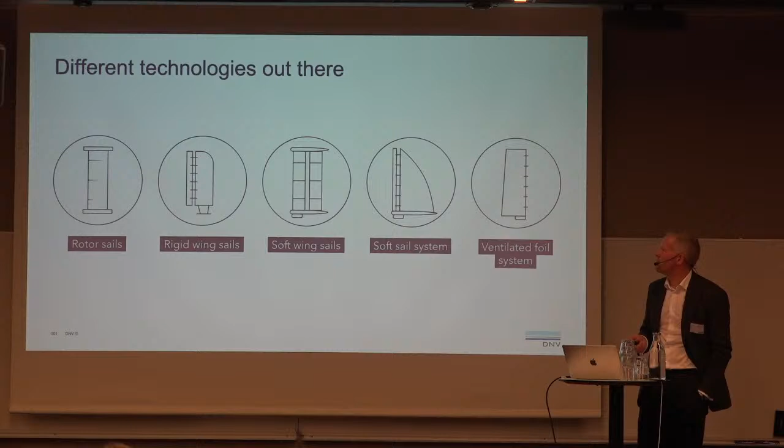Also, as Sofia was mentioning, there are a lot of these various estimation and calculation tools that have been developed, and as far as I'm aware, you can also find them freely available on the World Wide Web for the ones who want to test their design and what a sail solution might do for them in their trade and their type of ship.

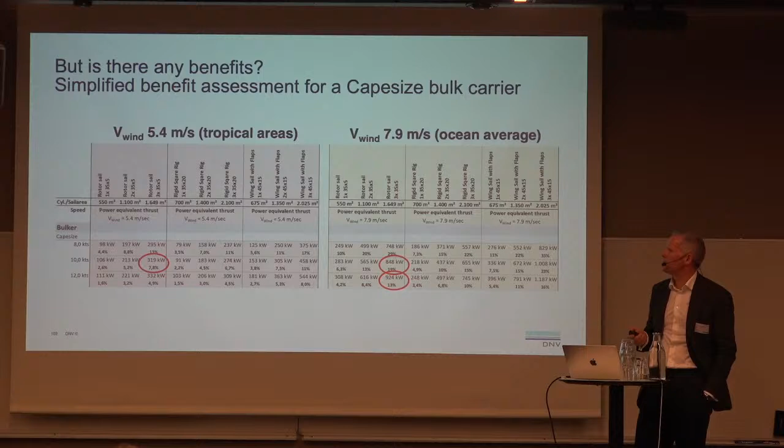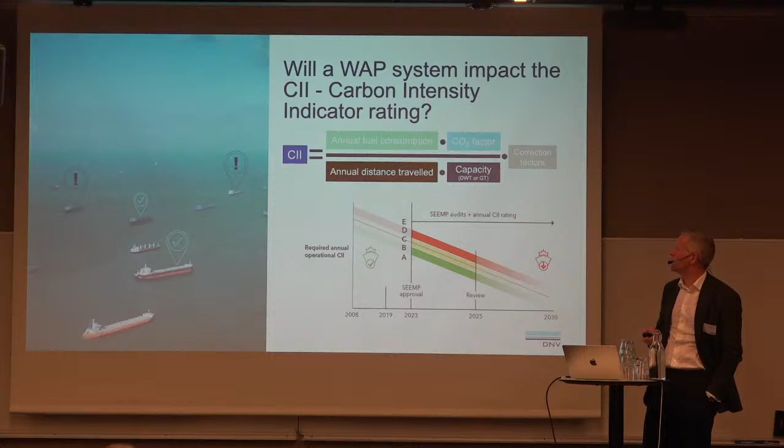Moving on, I talked in the beginning that DNV was 160 years old. We started out with rules and regulations for wind-assisted propulsion. That is what we were doing at that point in time. We are still maintaining those rules, so we have a few ships that have sails that are in class. Among them, Götheborg, in some direction from here, that is in DNV class, based on the tall ship rigs notation. So we have worked with this from a DNV point of view for quite some time. Obviously, what we are talking about now is maybe a bit of a different ball game, right? So we developed rules for the new type of sail solutions or WAP solutions.

They were released, I think it was in 2019, and continuously updated. We have heard many times today that this is a moving target. We're gaining more and more experience as we have more and more ships installing these types of solutions. So I think you can expect that these rules and regulations will develop quite significantly over time as well.

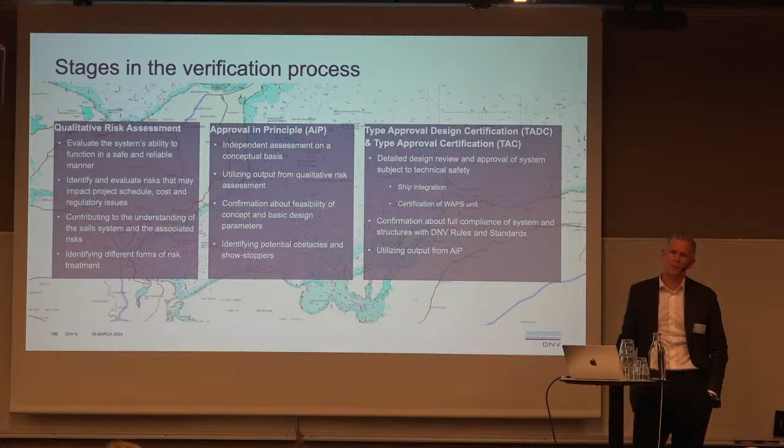The first phase that we often look at is the approval in principle aspect, making sure that in an early stage of development, the technology is feasible from a rules and regulations perspective. And then you can develop that into a more detailed assessment with the TADC, Type Approval Design Certificate, or type approval, which is more stringent and has more requirements. But it all starts out with: have we identified the risks in relation to our design and how that will affect the ship where we intend to install the equipment?

So what are we to cover then in a risk assessment? How do we know, if I want to design a new technical solution? Well, it's quite a number of factors that need to go into the risk assessment to make sure that this is safe and reliable for the ship crew. We need to take into account all the various operation modes of the ship and the sail, and how the sail solution will interact with other ship systems. And again, we're talking about new and novel technology here. It's a lot of unknowns, a lot of uncertainties, and a lot of technology that is developed bespoke.

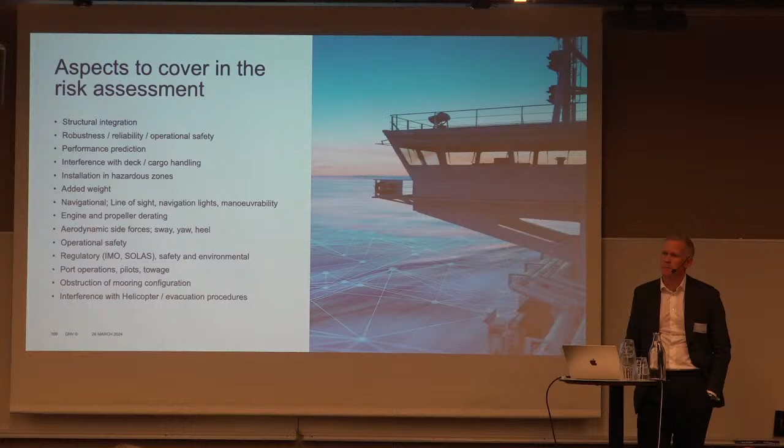In some cases, of course, we needed to implement design changes or measures to improve the design and reduce the risks. In other cases, we needed to include different types of testing to make sure that these risks were managed. These several hundred risk items were then boiled down into a test program that was done throughout the development and installation of this sail solution.

So it's of course nice with prescriptive rules. The rules that we have currently are not as prescriptive. They are more based on making sure that we are able to demonstrate that we have identified and managed the risks and that we can prove that we're closing those out in various kinds of tests throughout the development.

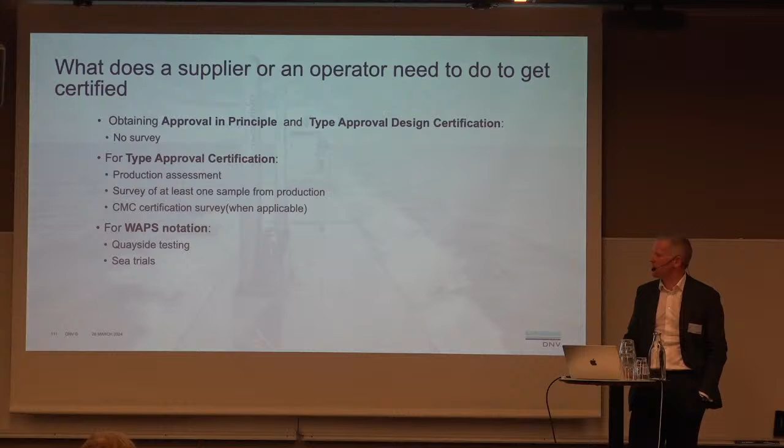So that is what you need to do in order to be in compliance with the rules and regulations that we currently have. So what we are doing in DNV, obviously we have the classification colleagues that are doing the work that I have now described from a regulatory point of view, providing the AIPs or TADCs or whatever is needed from a rules and regulations point of view.

What we are doing in advisory is trying to support both suppliers as well as ship operators with very much the same topics that have been discussed earlier on today. What would be the best solution in our type of trade for our type of ship? Making sure that risk assessments are carried out and documented and closed out throughout.

Of course, what many are looking at now is wind-assisted propulsion. Yes, it's on the table. When do we need to start thinking about it from an EEDI, or not EEDI but CII perspective, so to say? So supporting in those decision making as well. Good.

The intention was today to have a bit broader view than only talk about what DNV is doing. That failed dramatically. But the other classification societies are, of course, active in this field as well, working with similar topics. And if you look at all of the big ones, they have similarly developed rules and regulations and points of view when it comes to wind-assisted propulsion and have their opinions on this as well.